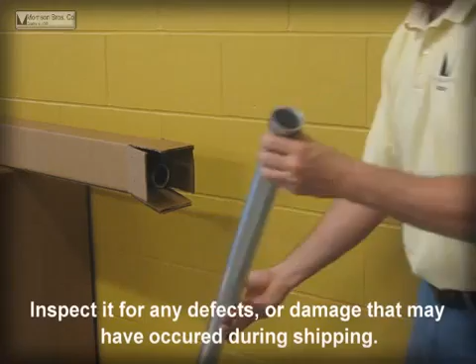First, remove the drop tube from the box. Inspect it for any defects or damage that may have occurred during shipping. Next, calculate the appropriate length of the drop tube. Drop tube lengths are regulated by state and local requirements, so it's important to accurately determine the correct measurement.

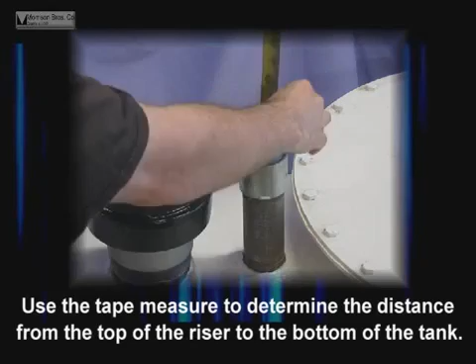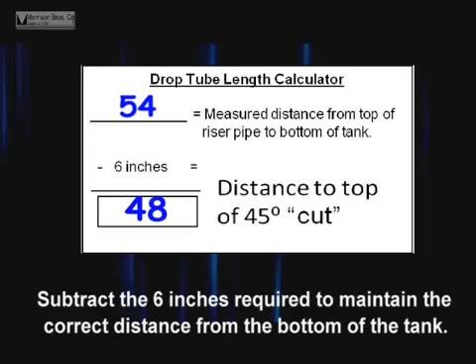Let's use the state of California as an example, where the top of the 45-degree cut can be no greater than 6 inches from the bottom of the tank. Use the tape measure to determine the distance from the top of the riser to the bottom of the tank. For this example, we'll say 54 inches. Subtract the 6 inches required to maintain the correct distance from the bottom of the tank, and make your mark at 48 inches.

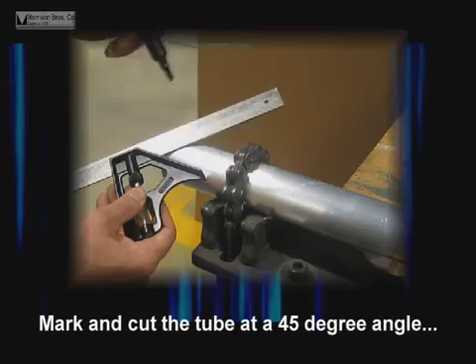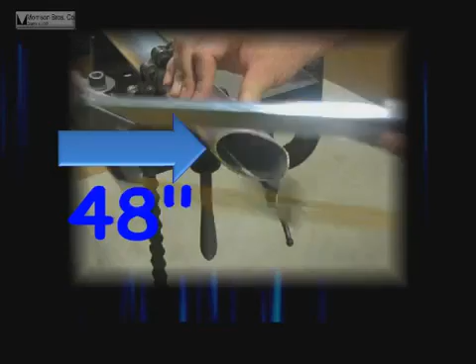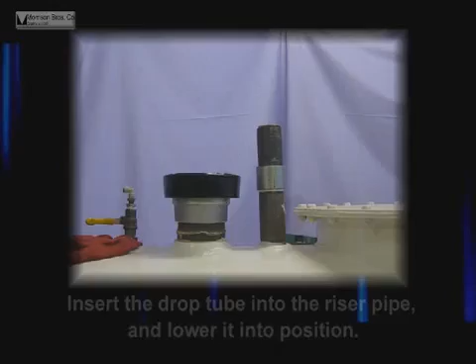Mark and cut the tube at a 45-degree angle, making sure that the 48-inch mark will be at the top of the 45-degree angle. Insert the drop tube into the riser pipe and lower it into position. At this point, it's very important to verify that the drop tube is cut to the proper length. This verification should be completed before any additional fittings are added to the riser pipe.

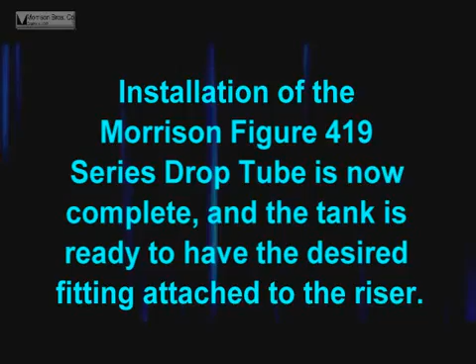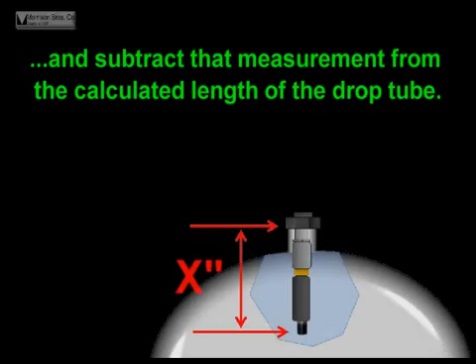Installation of the Morrison Figure 419 series drop tube is now complete, and the tank is ready to have the desired fitting attached to the riser. When using a 419 with a Morrison 9095 overfill prevention valve, the installer must take into account the overall completed length of the valve assembly from the top of the riser to the bottom of the nipple, and subtract that measurement from the calculated length of the drop tube.

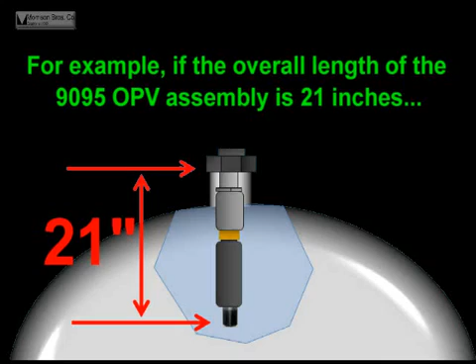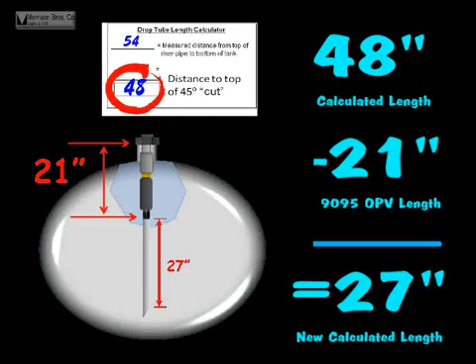For example, if the overall length of the 9095 OPV assembly is 21 inches, the 48-inch mark in this example would now be at 27 inches. If the 419 is used with the diffuser, the top of the diffuser opening should be no greater than 6 inches from the bottom of the tank.

The drop tube does not require any assistance during operation, and there is no regular maintenance required for this product, but local codes may require specific procedures.